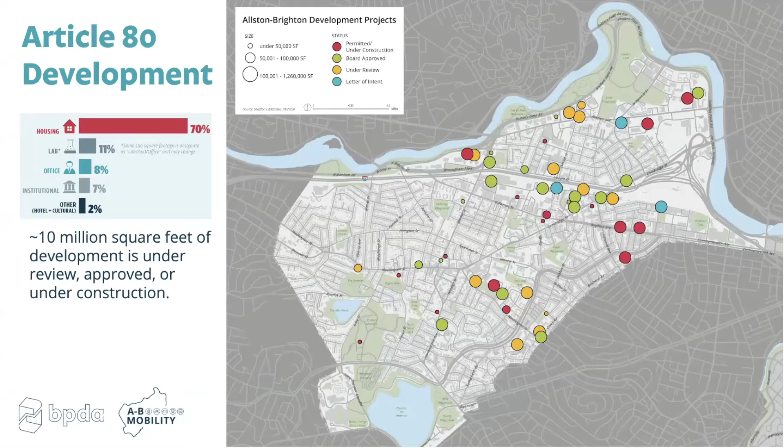Turning to background and why we prepared this plan. As many of you already know, a main impetus for this study has been the pace of new development in recent years. As shown on this slide, during the last several years, approximately 10 million square feet of new development has been filed for review, been approved, or is under construction. This makes Allston-Brighton one of the fastest growing neighborhoods in Boston. Concerns about the pace of new development and the ability of existing transportation infrastructure to support this development have prompted this plan.

Now I'd like to tell you a little bit about how we developed the plan. We started this process in the fall of 2018. As shown in this timeline, the process has involved 3 main phases: defining the problem, analyzing and testing options, and presenting draft recommendations. During each phase, we've had many conversations in the community, mostly in person, but also online. As shown in this chart, to date, we've held 3 open houses, half a dozen area workshops, met with 10 civic groups, and offered 2 different online mapping tools.

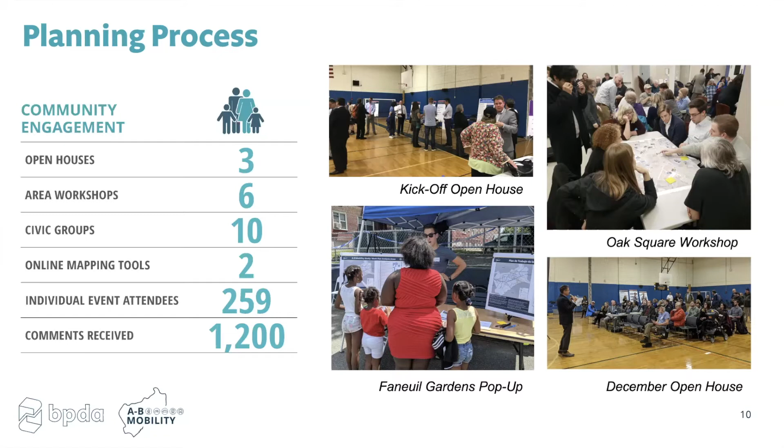All combined, these have generated significant public comment. During the process, over 250 individuals have attended public meetings in person, and through a combination of in-person and online engagement, we have received over 1,200 comments. Plan recommendations reflect many of the comments we've heard from you. Many of these comments have been transcribed and are interspersed throughout the plan, as shown on this slide.

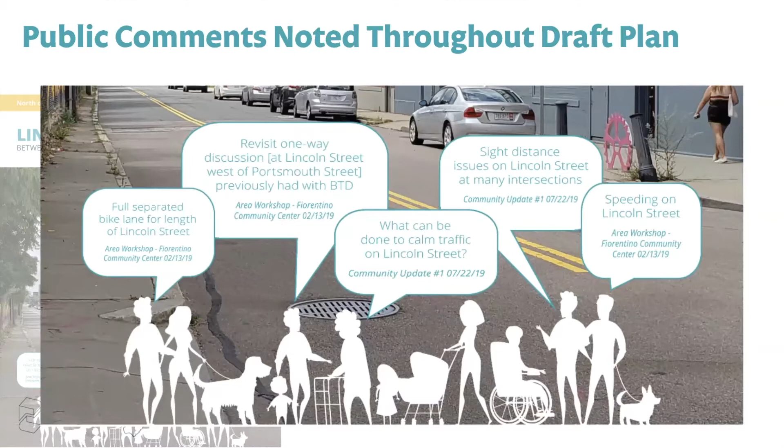What we will be presenting today is the final draft plan. The lion's share of the recommendations that are contained in the plan have been vetted publicly over the last year, starting in the fall of 2019. Toward the end of this presentation, I'll tell you about various ways to review and comment on the plan between now and the deadline for comments, which is January 15th, 2021.

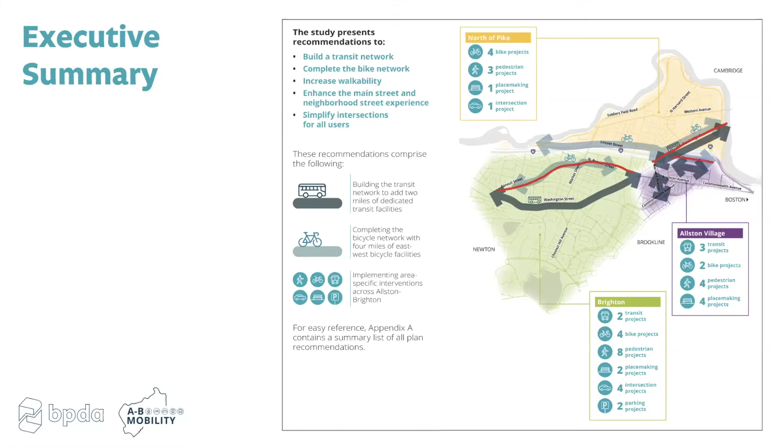Now I'd like to call your attention to this transit network map, which reflects certain draft plan proposals to improve and expand transit. I've already introduced you to the recommendation for the bus priority lanes, extending from Oak Square to Union Square and beyond.

Let me tell you more about how the bus priority lanes will work. This diagram shows the existing cross-section on Washington Street and Cambridge Street. Curbside parking is available on both sides of the street, with bicycle lanes inboard of the parking and 2-way vehicular travel lanes down the center of the street.

Compare that to this cross-section representing the proposed peak hour bus lanes. In this proposed cross-section, during morning and afternoon rush hours, on-street parking would be replaced by bus priority lanes. During the morning and afternoon peak hours, buses will travel next to the curb. Bikes will use the next lane in, and vehicles would travel along the center 2 lanes.

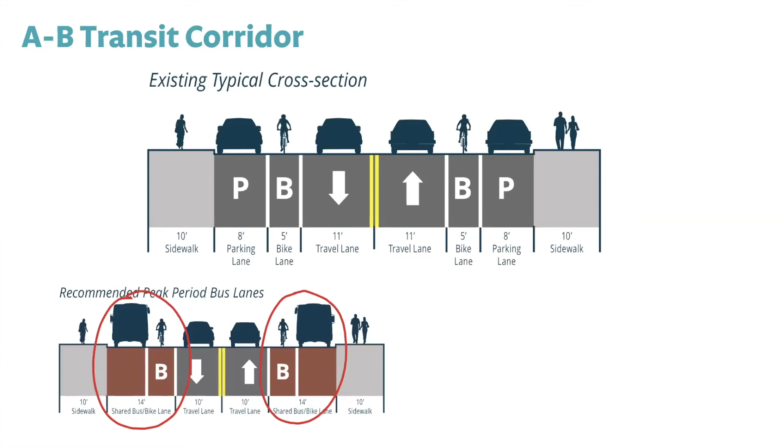We estimate that the peak hour bus priority lanes will reduce bus travel times between Oak Square and Union Square by up to 11 minutes eastbound and up to 6 minutes westbound. The peak hour bus lanes will be very similar to the peak hour bus lanes that have been operating successfully on Washington Street between Roslindale Square and Forest Hills since 2017.

Off-peak, that is, during most of the rest of the day, as shown in the street section on the right, the bus lanes will be replaced again with on-street parking, and bicycles will use the marked on-street bike lanes.

The bus priority lanes would begin as a pilot. At the end of the pilot, an assessment would be made to determine if the bus priority lanes should be made permanent. Also, before installing the lanes, the city will conduct a parking utilization study along Washington and Cambridge streets to determine the appropriate strategy for managing on-street parking.

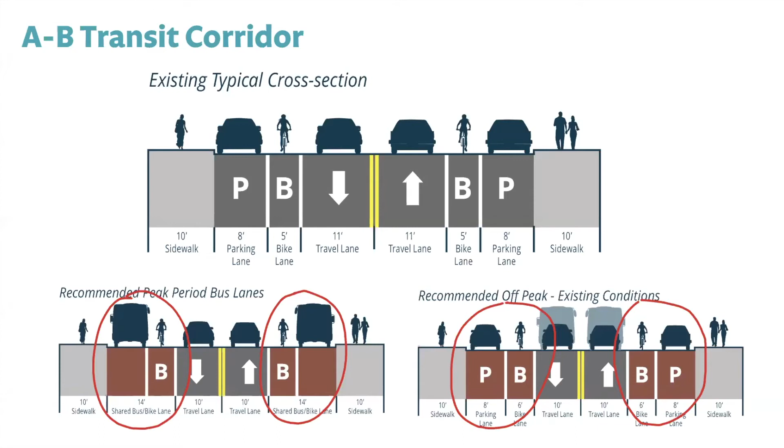The transit network map also shows where work still needs to be done to resolve a gap in the proposed new bus network on Cambridge Street, just east of Union Square. This planning work will be carried out in 2021.

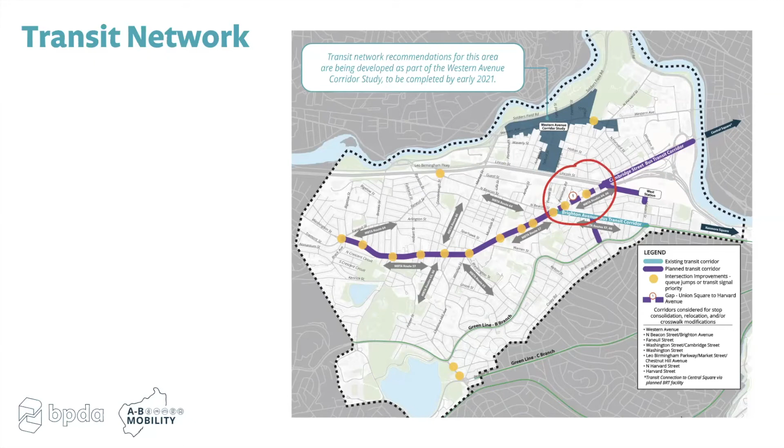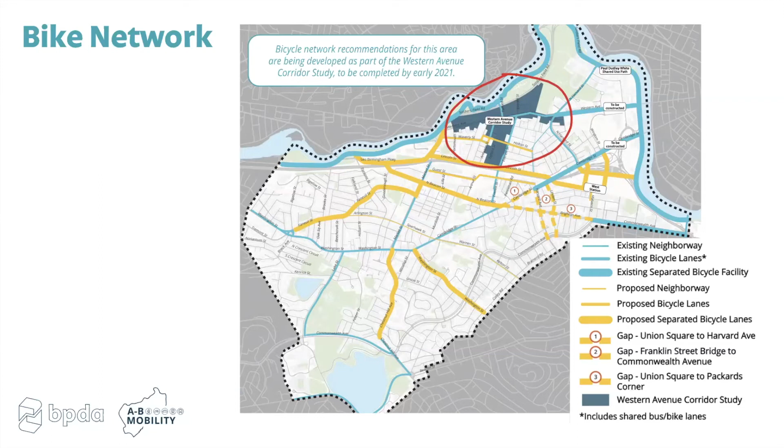You'll also note that the map highlights boundaries of the Western Avenue Corridor Study and Rezoning Project. Underway right now, the Corridor Study is engaging the community to explore different land use and development build-out options. Integral to this analysis will be transportation improvement options and recommendations. Transportation recommendations coming out of the Western Avenue Corridor Study will be incorporated by reference into the AB Mobility Plan.

Finally, the area-wide recommendations also address placemaking. Placemaking is an approach to planning and design whereby the goal is to make public spaces more interesting, engaging, and memorable. From a transportation perspective, good placemaking encourages more walking.

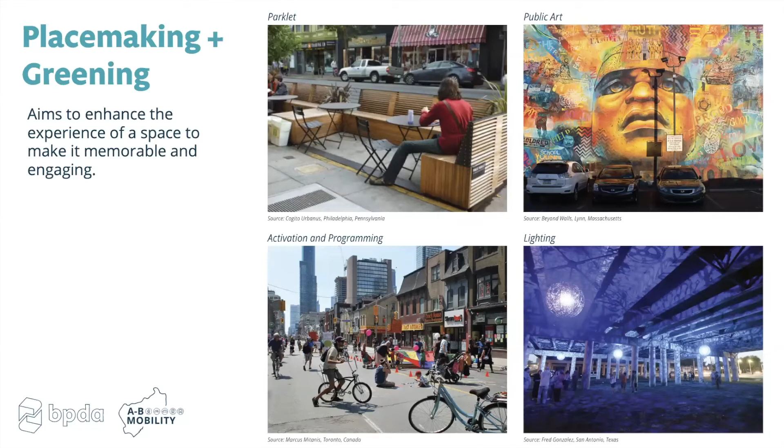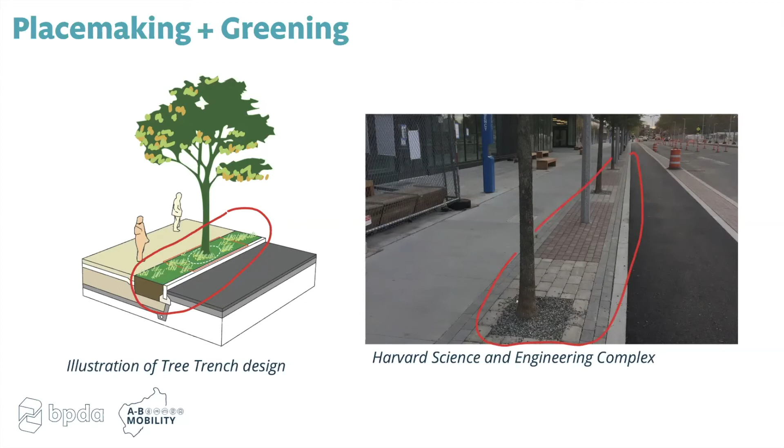One of the key placemaking recommendations of the AB Mobility Study is a pilot tree planting program involving a continuous tree trench. As shown in this diagram, a continuous tree trench running between trees helps capture more rainwater, improve irrigation, and increase tree survival. This photo shows a tree trench capped by permeable pavers that was recently built in front of Harvard's new Science and Engineering Complex on Western Avenue near Barry's Corner.

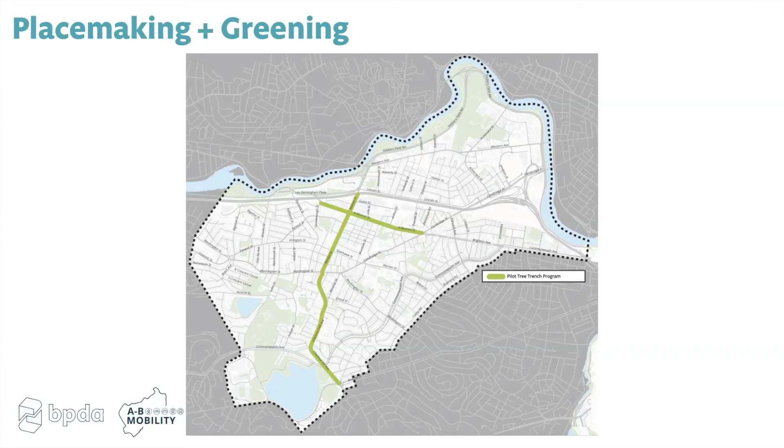The draft plan contains additional placemaking recommendations for these other parts of Allston-Brighton, as described in Chapter 5.

Chapter 6 of the plan contains over 50 recommendations for different areas of Allston-Brighton. To whet your appetite for perusing the plan yourself, I'm going to give you a glimpse of just a few of the plan's recommendations.

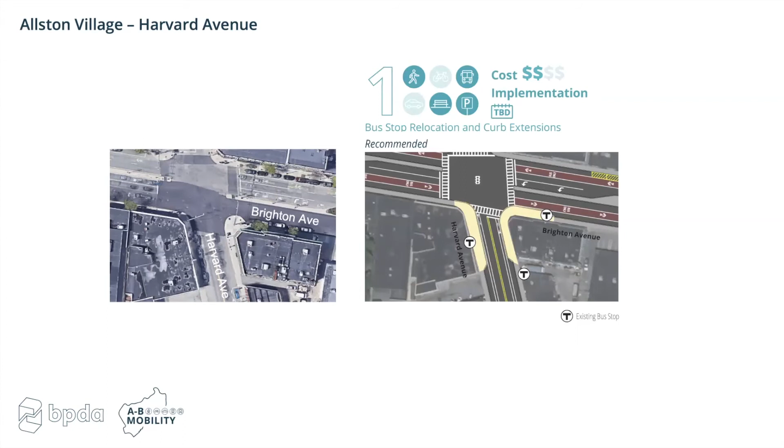In Allston Village, for Harvard Avenue, short-term recommendations call for relocating bus stops, extending curbs, and adjusting curbside use regulations. Curbside use changes may also include placemaking opportunities. The long-term recommendation for Harvard Avenue calls for dedicated bus lanes and a spacious plaza between Commonwealth Avenue and Brighton Avenue.

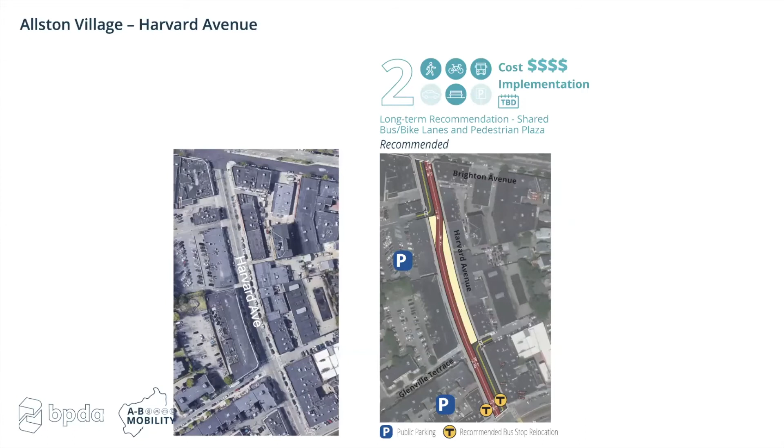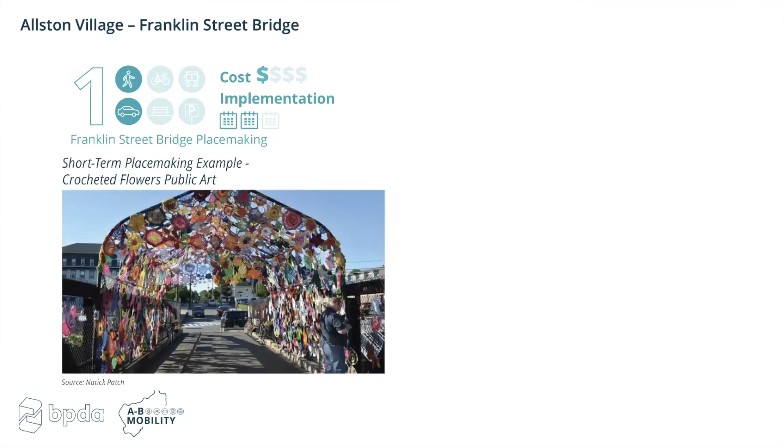Also in Allston Village, on the Franklin Street Bridge, the plan recommends creative lighting and public art to improve safety and make the bridge more inviting.

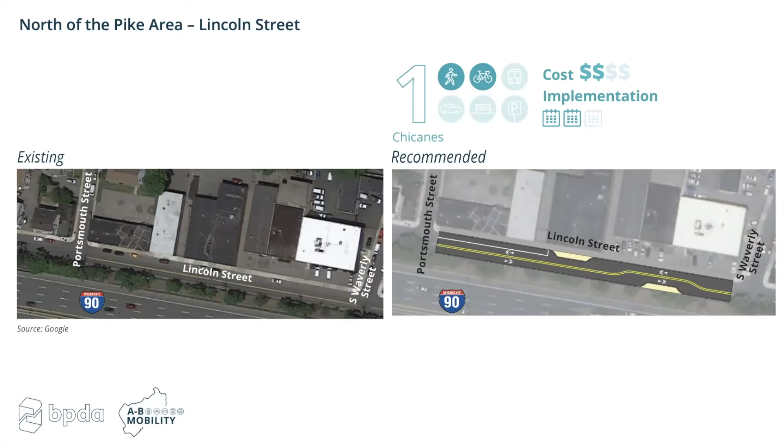North of the Pike, recommendations for Lincoln Street would help calm traffic by introducing chicanes, or in other words, a slight weaving pattern along the street, by alternating parking on different sides of the street. Also on Lincoln Street, an enhanced crosswalk would reinforce traffic calming while increasing pedestrian safety.

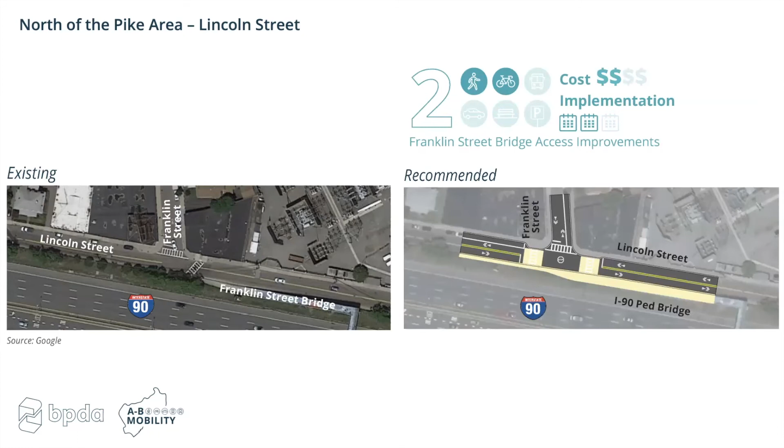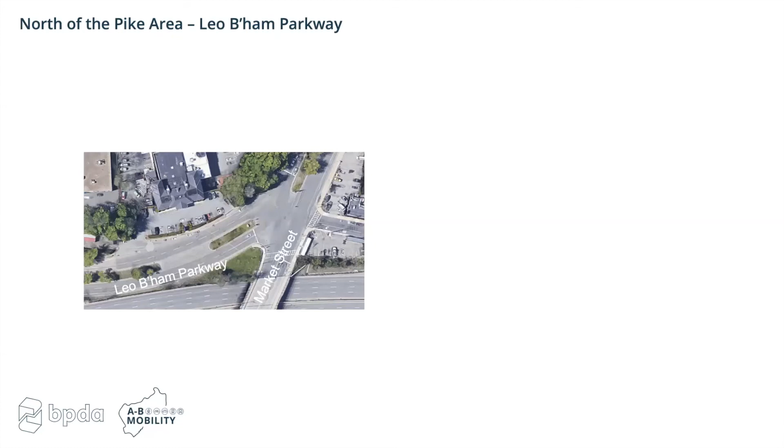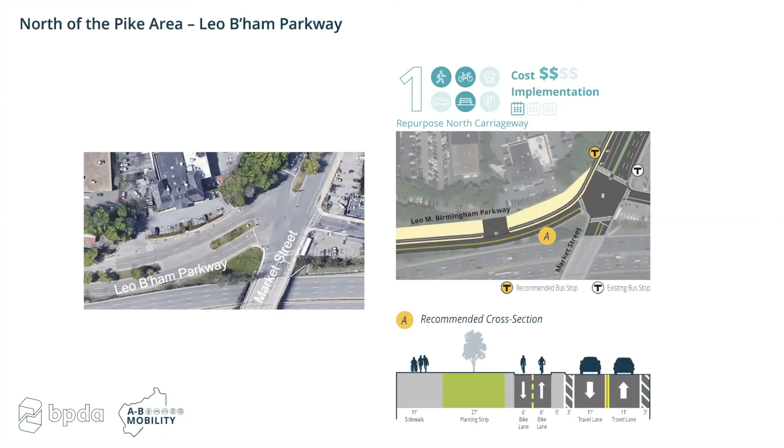North of the Pike as well, on Leo Birmingham Parkway, surplus roadway capacity provides the opportunity to repurpose the westbound carriageway to create a two-way bike path and additional open space, as shown here. The additional open space would also provide opportunities for placemaking.

The proposed improvements would begin as temporary or what we call tactical changes. If successful, they would be made permanent.

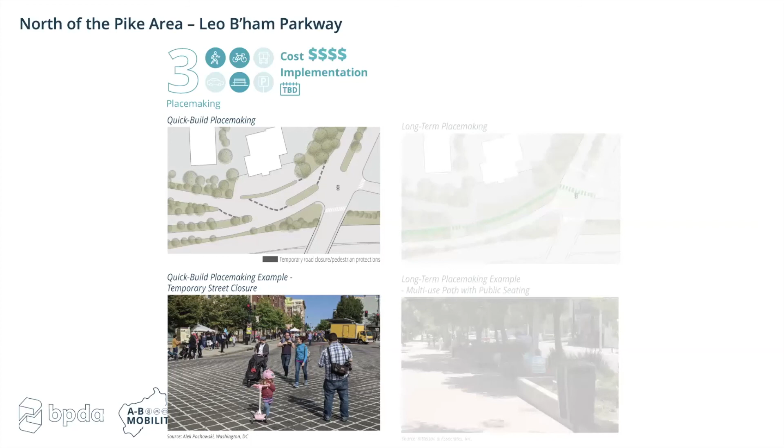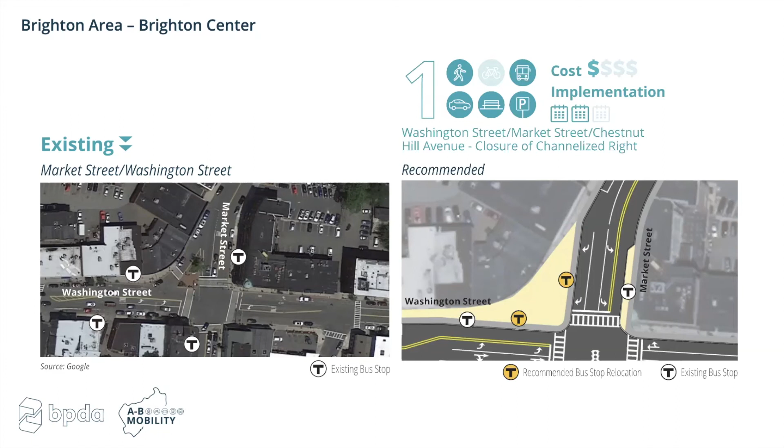Back over in Brighton Center, temporary tactical strategies could also be used at the intersection of Washington Street and Market Street. Here, the plan proposes moving the right turn slip lane over towards the center of Market Street, creating new space for a plaza and potentially public art where the slip lane currently exists. Note that the right turn lane would not be eliminated, it is simply moved over.

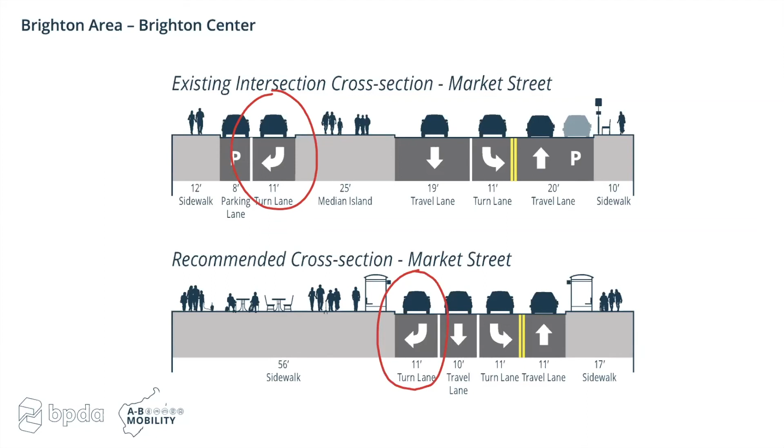Once again, these changes would start as temporary and if successful, could later be made permanent.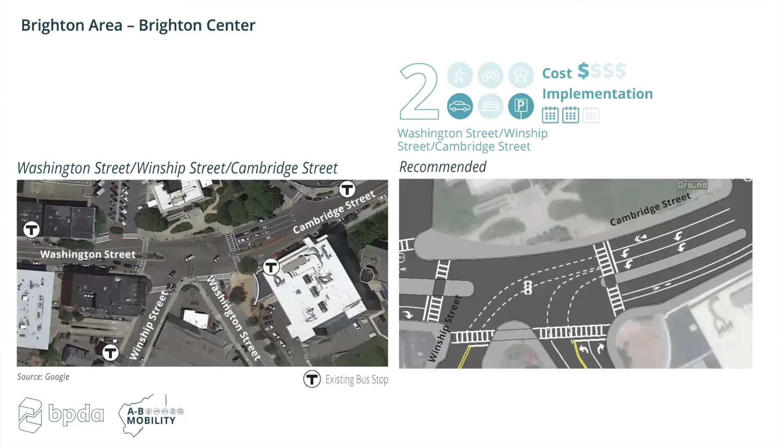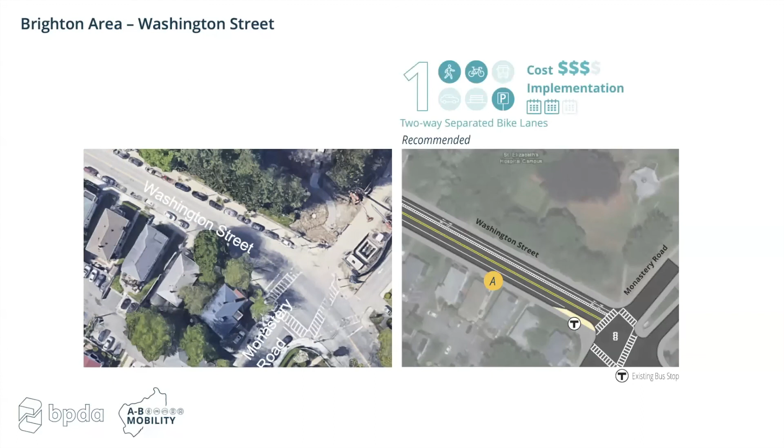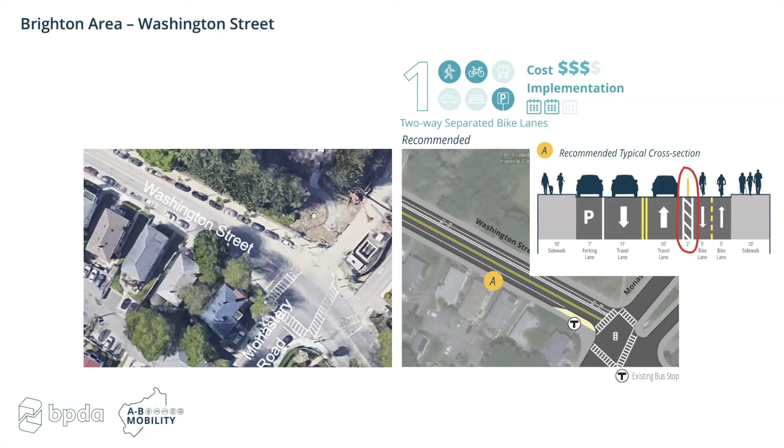Still in Brighton, on Washington Street between Brighton Center and Corey Road, the plan recommends a two-way bike facility. As shown in the proposed street section, a two-way bike path would be physically separated from vehicular travel lanes. This recommendation would require removing parking on one side of the street. Before implementing it, a study would be conducted to understand impacts on parking, and BTD would conduct a localized community process to engage residents, abutters, and stakeholders in the design of this facility.

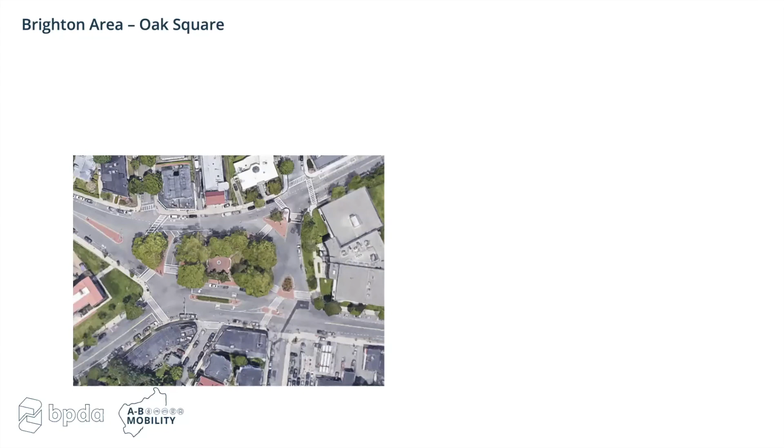Finally, over in Oak Square, in response to very clear requests from the local community, 2 enhanced crosswalks are recommended at these locations, and pickup and drop-off zones would be created at these locations.

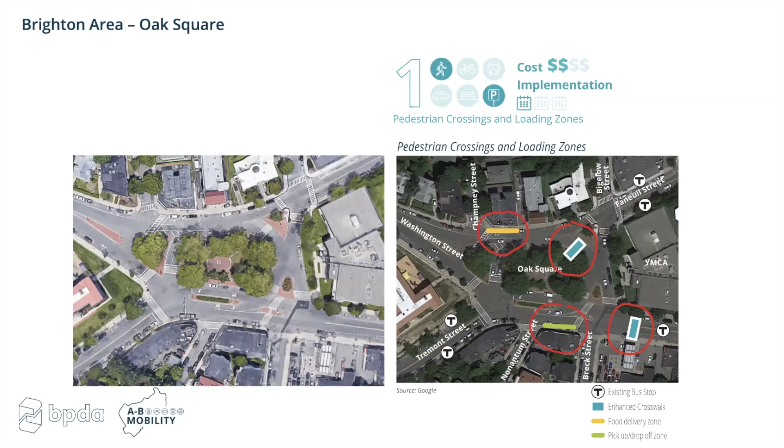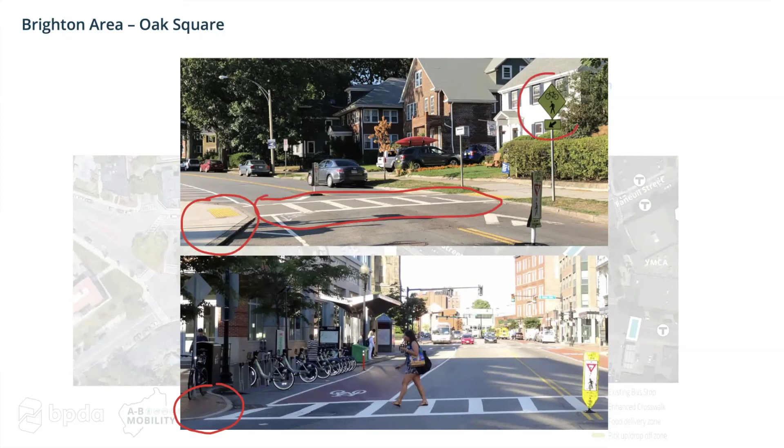Examples of strategies to enhance crosswalks are shown in these photos. They include curb extensions, raised crosswalks, signage, and vertical posts, among other possible strategies.

Earlier in the presentation, I mentioned that Chapter 7 contains the action plan. The action plan lists nearly 20 recommended projects that will be completed between 2021 and 2025, including 9 projects that will be completed during 2021.

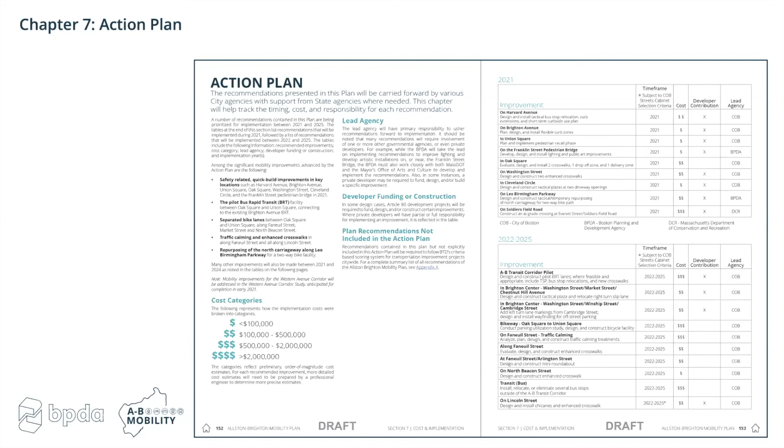As you can see, the action plan uses cost categories, similar to what you might find in a travel guide, to indicate the relative cost of improvements. It also shows the time frame for implementation, whether there will be a developer contribution, and the lead agency responsible for ushering the project forward.

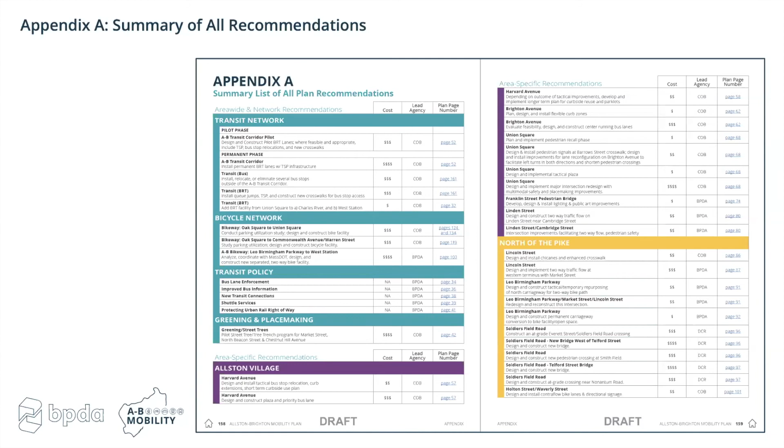In addition to the action plan, the draft plan contains Appendix A, a list of all the plan's over 50 recommendations, organized in the same way as the plan itself: first by area-wide recommendations, then by area-specific recommendations with the same color coding. Here you will find a brief description of each recommendation, cost category, lead agency, and the page number where you can find all the details.

But wait, there's more, lots more. We've shown you just a few of the plan's more than 50 recommendations for all of Allston-Brighton. We hope this presentation will entice you to attend some of the upcoming public meetings and chats with the planner, and download and comment on the plan on your own.

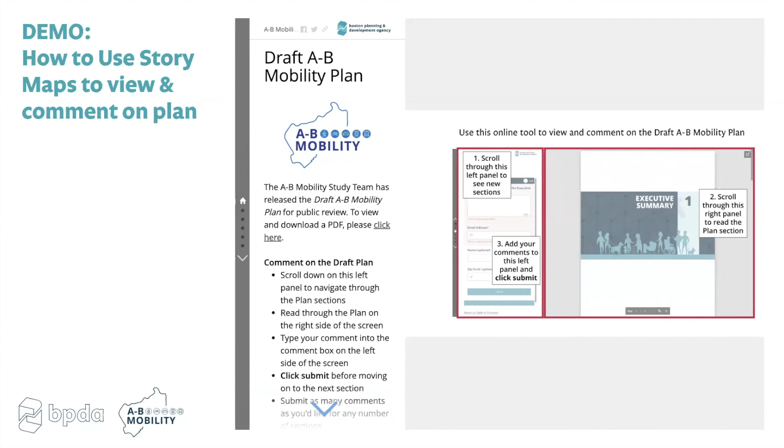You can visit our website to access this tool I'm about to show you. There are 2 portions of this feedback tool: a panel on the left side of the screen and a panel on the right side of the screen.

Using the panel on the left side of the screen, you can scroll between different sections of the plan. For instance, I'm scrolling on the left side now to reach the table of contents. Now I'm scrolling to get to the executive summary. Once you've scrolled to the section of the plan you want to review, you can then scroll through the right-hand side of the screen to view the pages in that section.

Then, enter any comments you have into the comment box on the left side of the screen. Make sure you click Submit before either adding another comment to that section or moving on to a new one. You can submit as many comments on as many sections as you'd like.

Additionally, we have a table of contents where you can click on a specific chapter of the plan and be directed right to it. Here, I'm clicking on the Lincoln Street section. At any point, you can click this text at the bottom that says 'Return to the table of contents' to be brought back to the beginning.